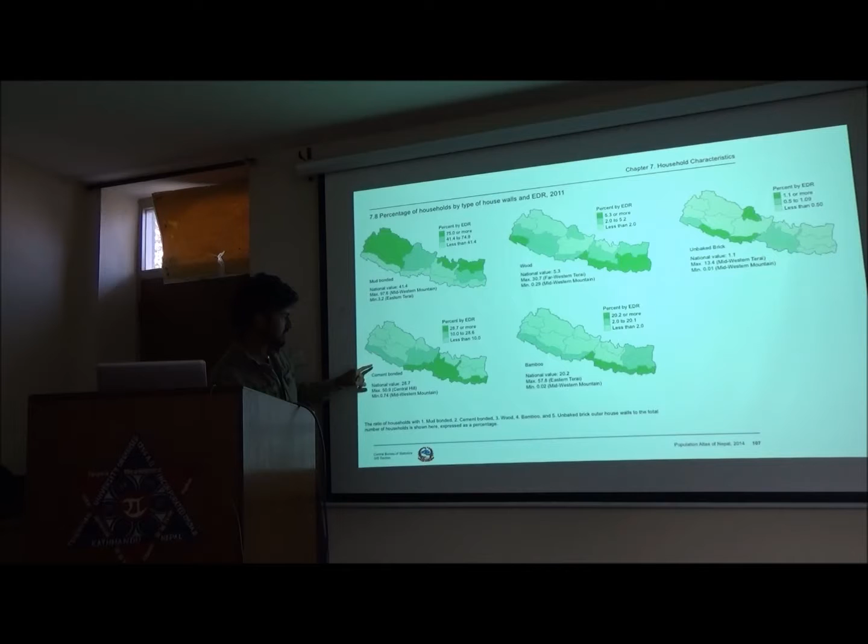The cement penetration in Nepal is very low. In some regions, like the eastern mountain region, it's as low as 1.15%. That's how much cement has reached. The maximum is 23%, which is in the plains where there is highway.

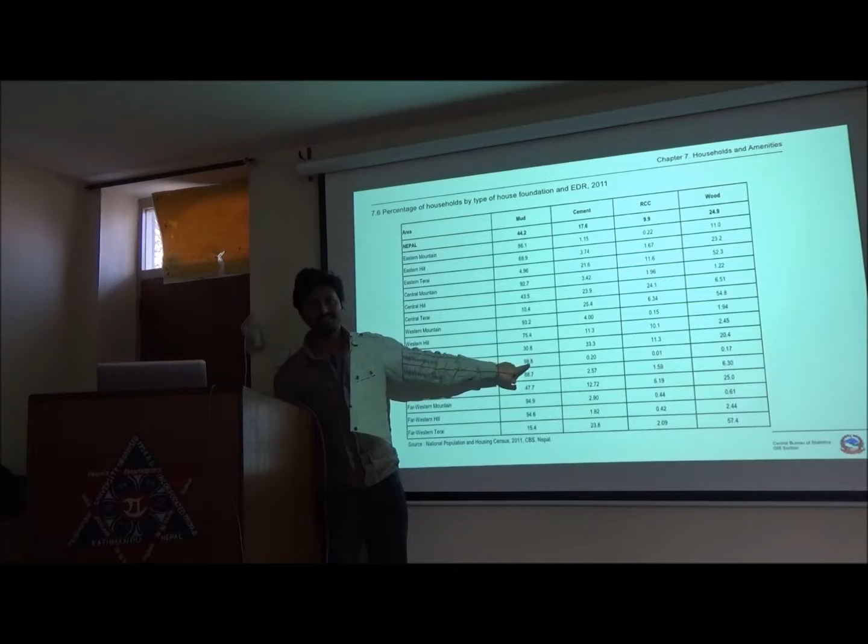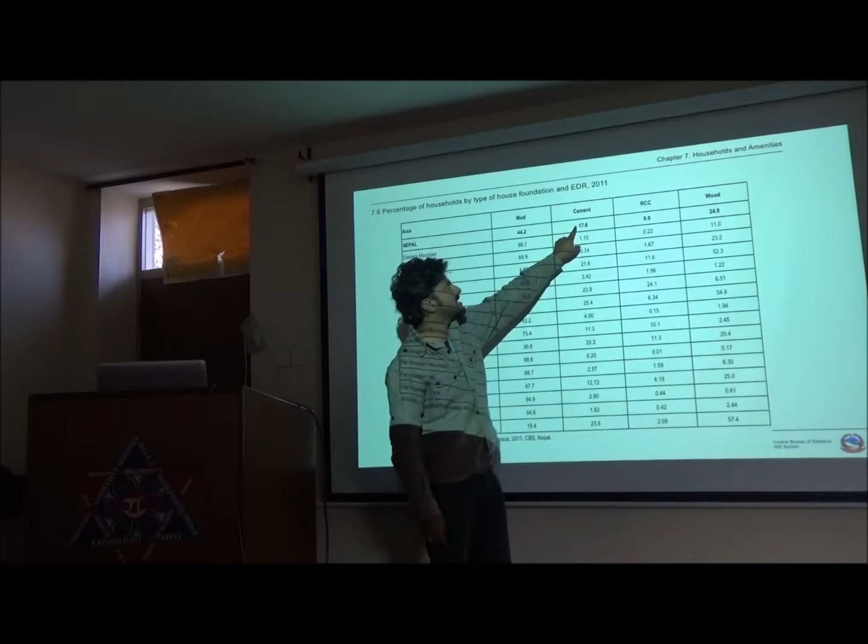But for example, in the mid-western mountain region, mud houses are 98.8%. And our government thinks mud is not the right way to build. So they are denying access, they're saying whatever you've done is illegal or wrong. 98.8%. And overall, in Nepal, there's only 17% cement penetration, and most of it is concentrated in the Kathmandu region.

So, there was a big earthquake, and a lot of people think it was only earthen houses that collapsed, and they did collapse. But for example, in this region of Chautara in Sindhupalchok, where cement penetration is only 1.1%, many cement houses collapsed. There were fewer cement house casualties because there were actually fewer in number. Of course, when you look at numbers, there were so many mud houses that collapsed, but that was because they were higher in number, in some cases 98%.

In Sindhupalchok, this whole valley, there's so many concrete houses that collapsed, they cracked. And what we're trying to say is, it's not like cement is bad or earth is bad. It's not about what you build with, it's how you build with it. That's really important. And this is what the earthquake taught us. So, this amount of cement buildings are going up every year. And the earthquake was a big setback. A lot of people lost faith in earthen buildings.

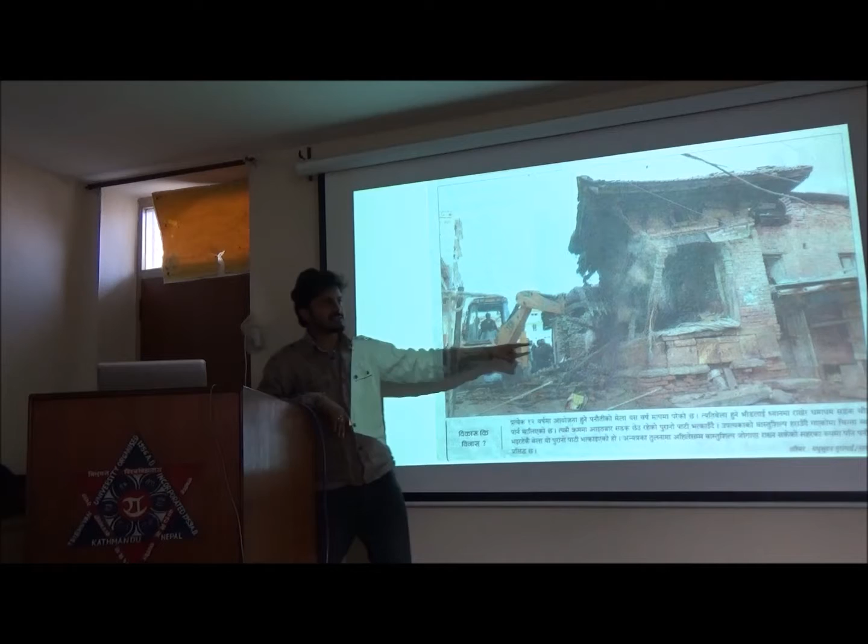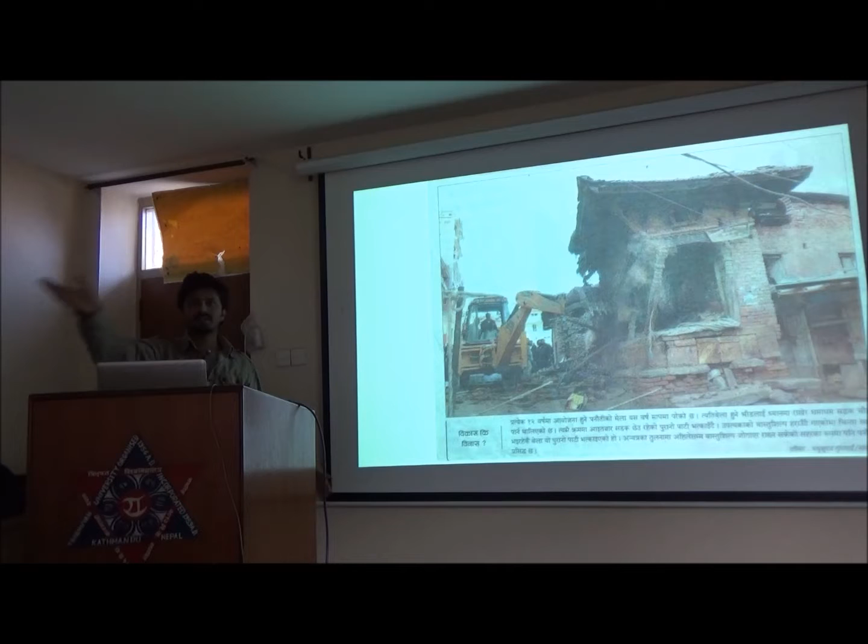But there's not only natural disaster, there's also man-made disaster. For example, this old settlement in Panauti, which is a really beautiful old Newari village. They took down all these public structures made with beautiful wood and earth so they can make bigger roads. They're knocking down beautiful temples and earthen homes so they can make 4-lane roads with concrete buildings on the side. It's really tragic. This is a picture from last week.

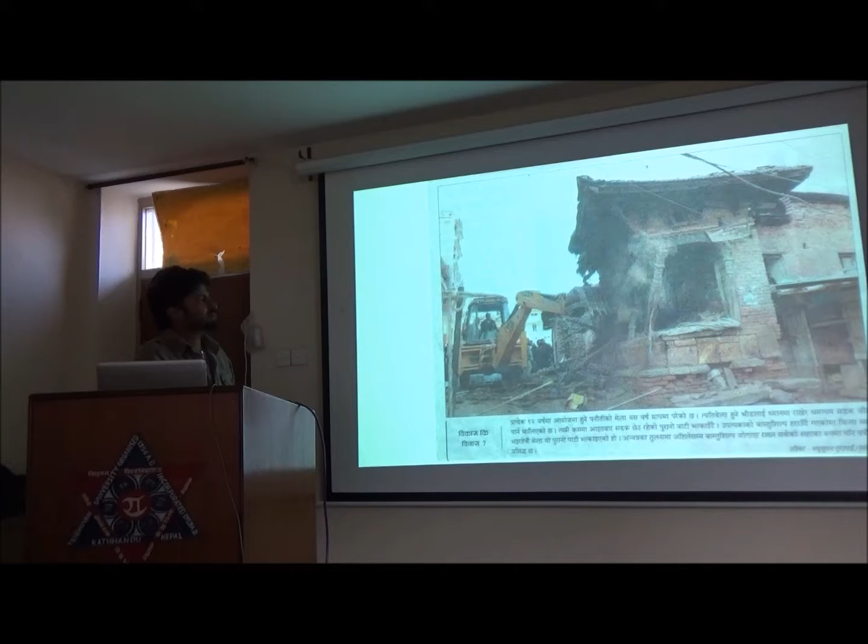And earth doesn't represent poverty. In Nepal, earth means poverty because we have not invested our human resources or our academic resources in developing it. Even in Kathmandu University, this university, the courses on earthen building are very, very low. It's almost non-existent.

But if you look at these homes in California, New Zealand, they're making really expensive homes. There are certain countries which are more progressive, like New Zealand, even though it lies in an earthquake zone, they're really promoting it. And California, also in an earthquake zone, they have a code. And actually, ASTM is coming up with a code. Actually, Nepal is not that bad. It has a code, but the energy needed to promote this material is not there, unfortunately.

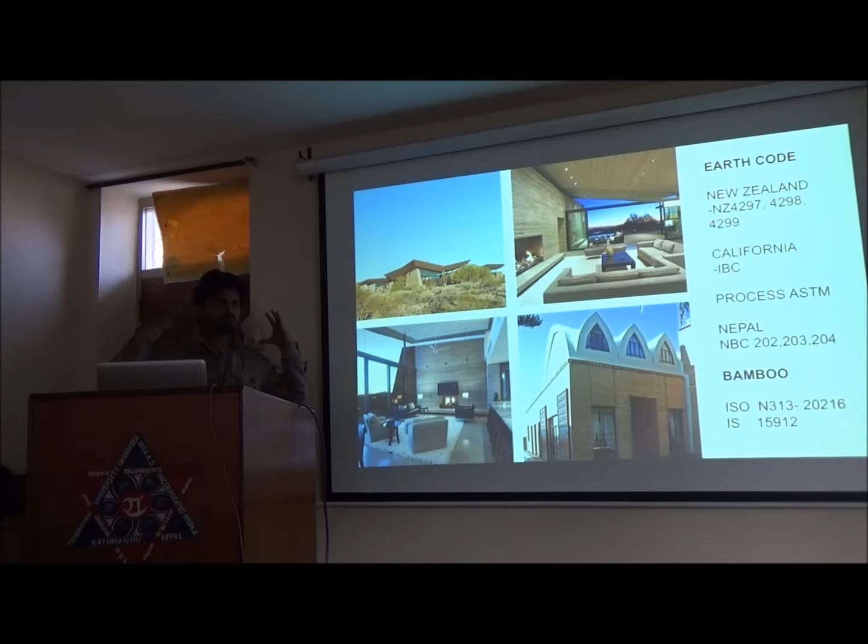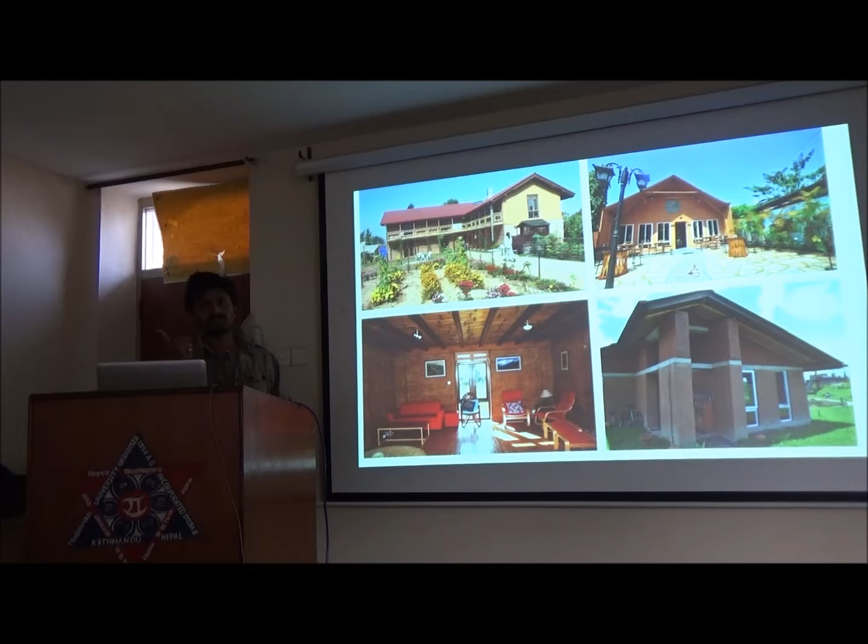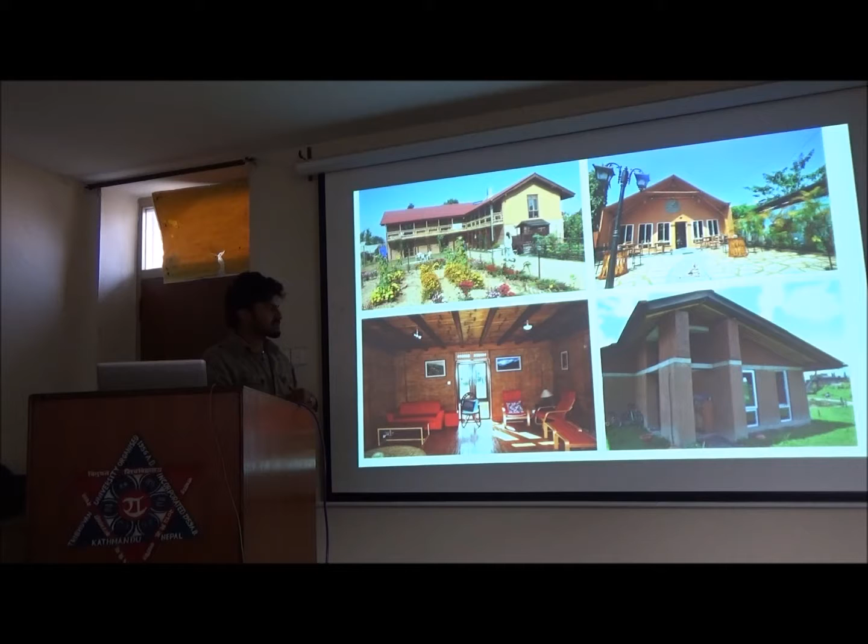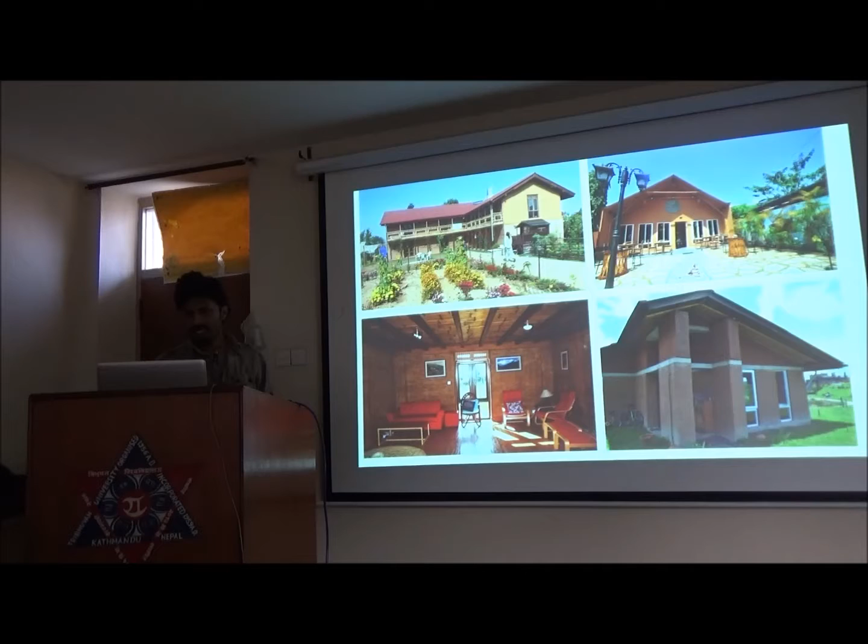So for the last few years, we've been building earthen homes in Nepal. We're trying to change the perception because we think it's not the material; we're facing two challenges. One is the perception that we have to change. The material is great, as you saw in the last slide. It's the same material, they're making beautiful homes, but the resistance to change is what's stopping us. So we are creating these modern homes with earthen materials to really fight this taboo.

In earth, we use two different materials. One is called rammed earth. It's a tradition which dates back hundreds of years, which is very common in Nepal, mostly in the northwest area. In Manang, Mustang, it was brought in by Tibetan culture. So basically you have a formwork as big as the size of your wall, and then you put clay, and then you tamp it till you get 50% compaction. It's a really great technique because it's monolithic. It makes the whole building work as a shear wall, like in concrete.

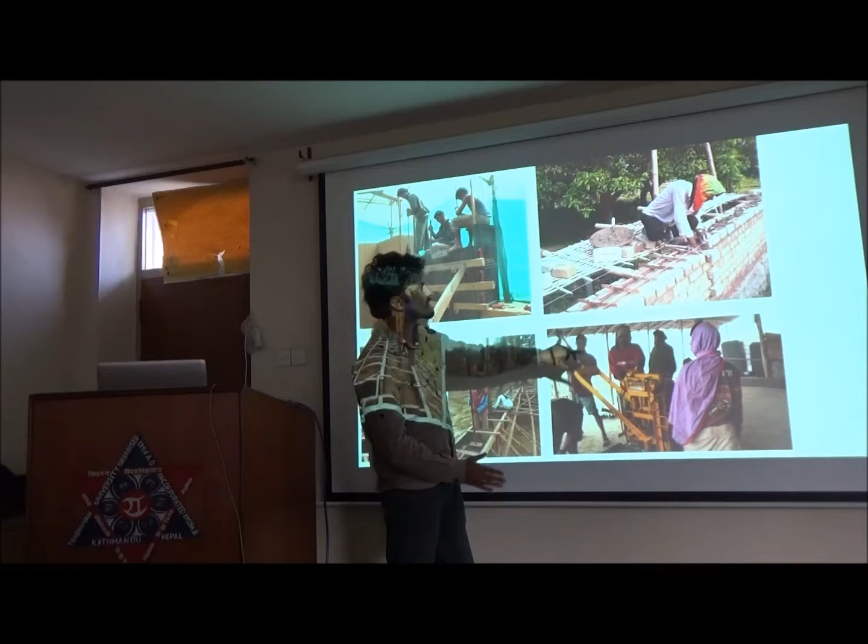It has one element, and then we do reinforcement in this, which I'll show in the next slide. And then the other material is a compressed earth block. These are basically the same material, but the application is different. Here, you make the blocks in a machine, and then you get your bricks and lay them. Here, you make them in situ, on site.

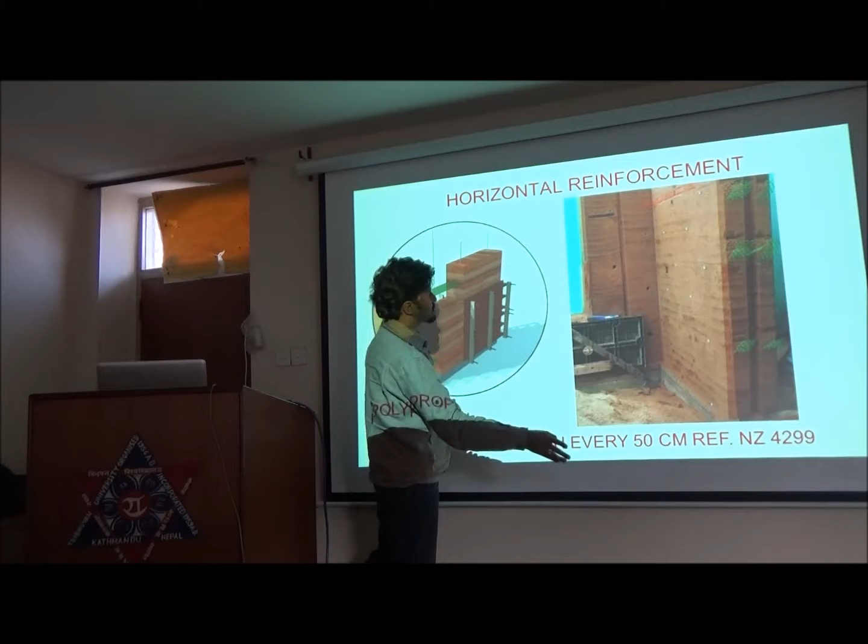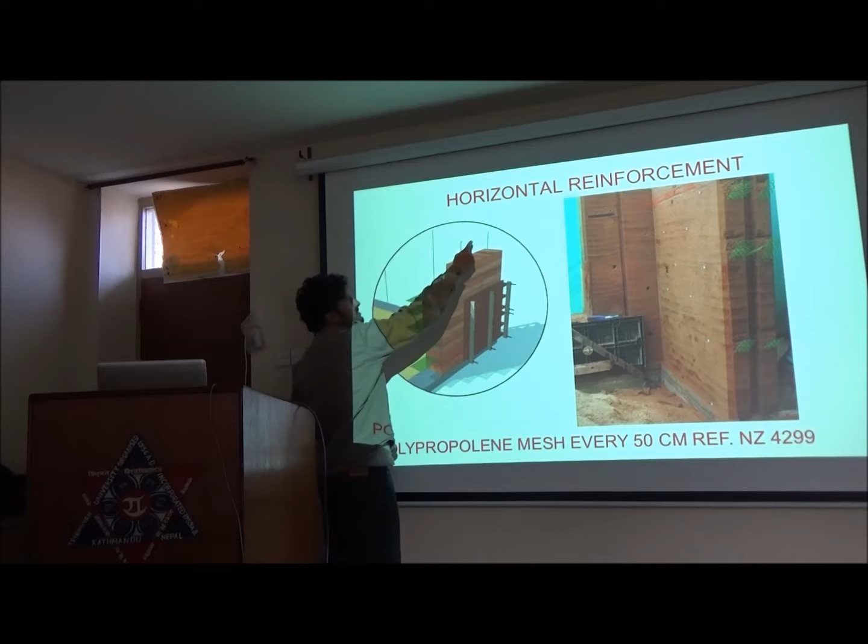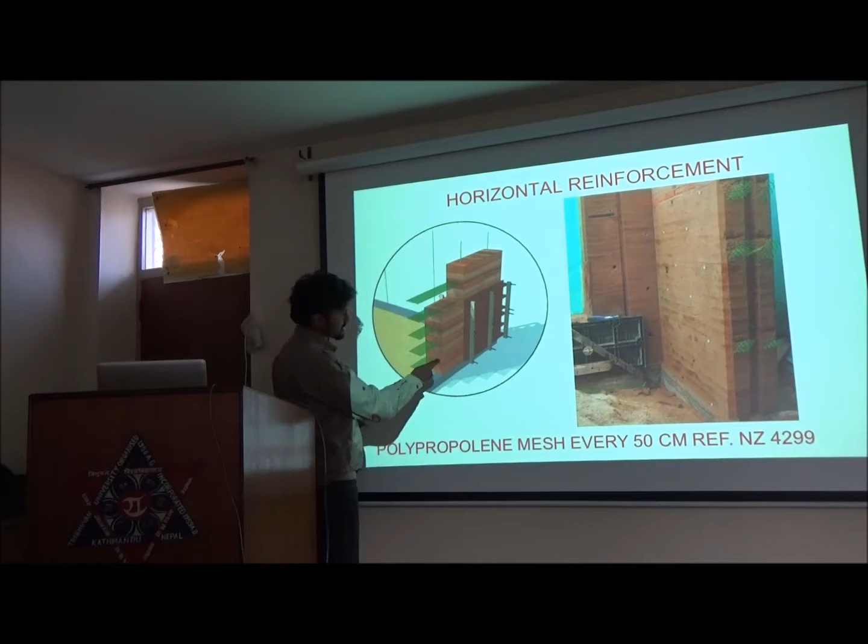Here's an example of the walls. We are very aware that it's an earthquake-prone area, so we reinforce it. We put vertical rods at the corners and near the openings, because that's the weakest point. And then we put this mesh, this polypropylene mesh, every 50 centimeters, or every 2 feet.

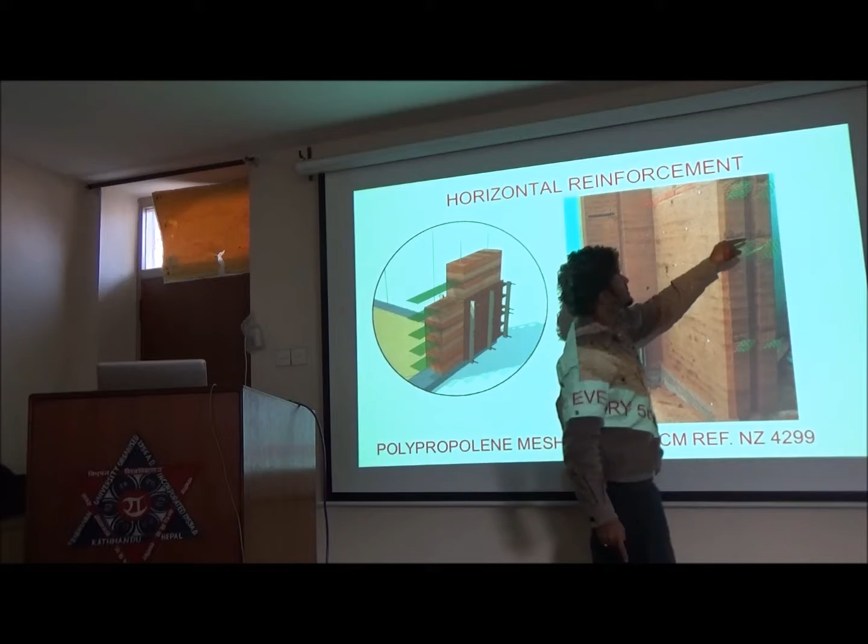Here's how you see it. So this works as stops for any lateral movement.

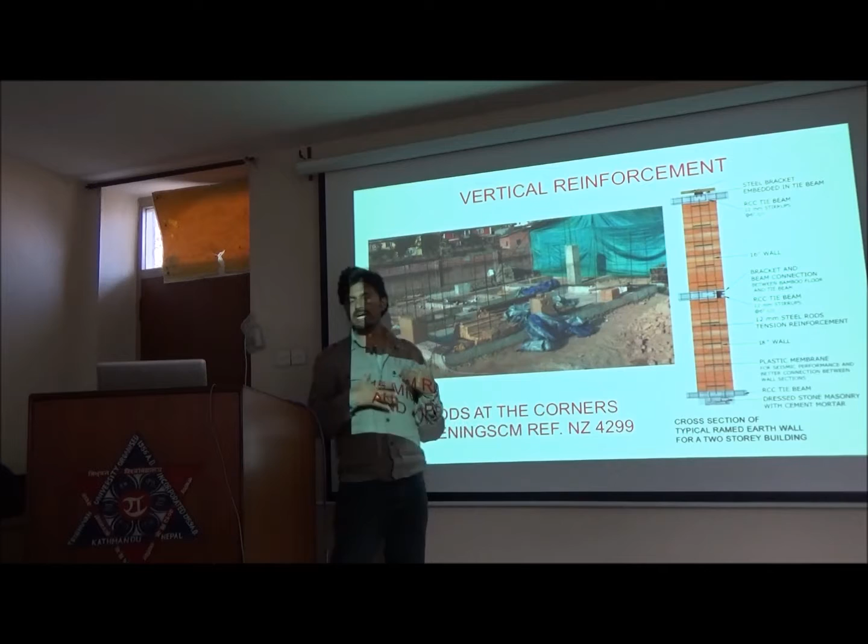So we do regular concrete foundation, you know, and every material has its own strength. We're not like bamboo or wood or earth fanatics. We want to use it judiciously wherever it is needed.

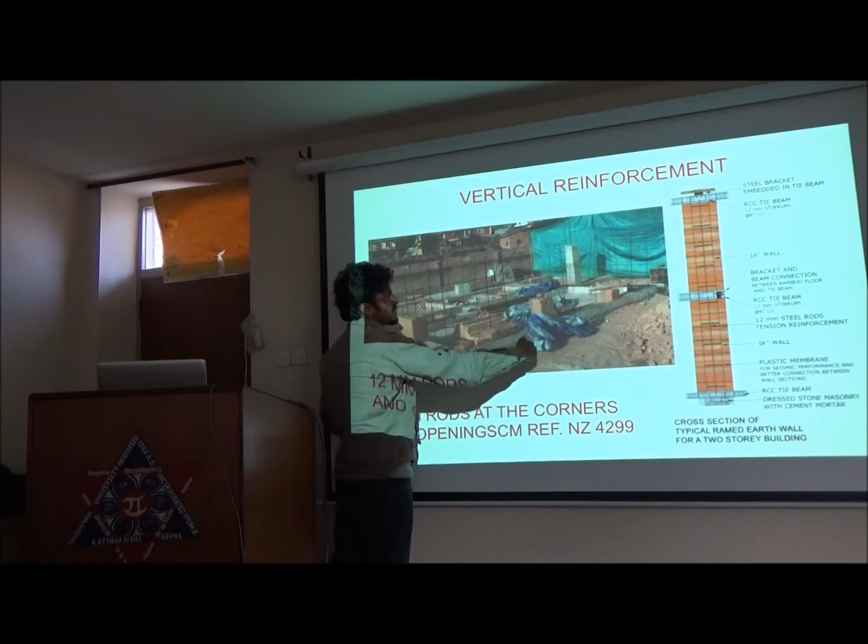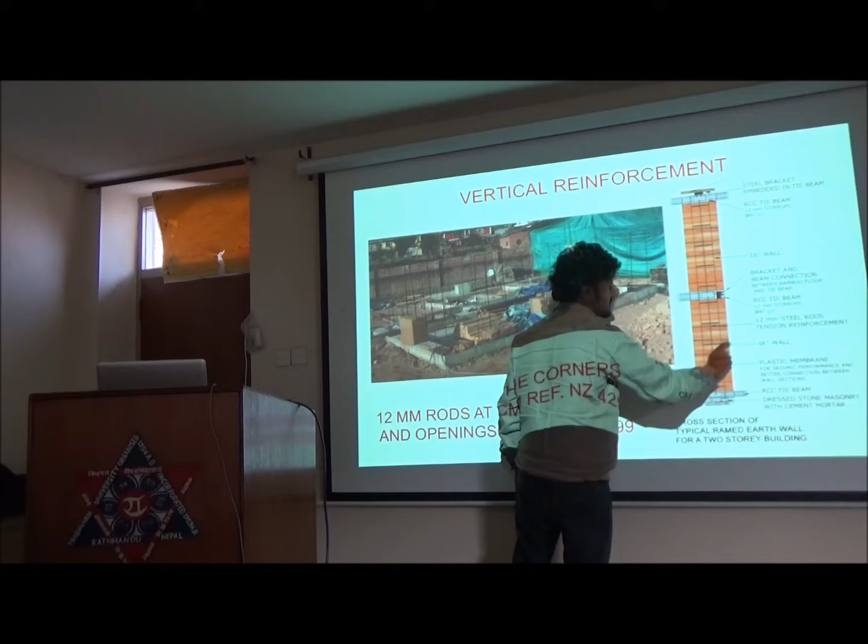So yeah, we have concrete bands and rebars at the openings. Here's a section: a concrete band, a rebar, concrete band, and another concrete band on top. The rest we just use mesh for tension reinforcement.

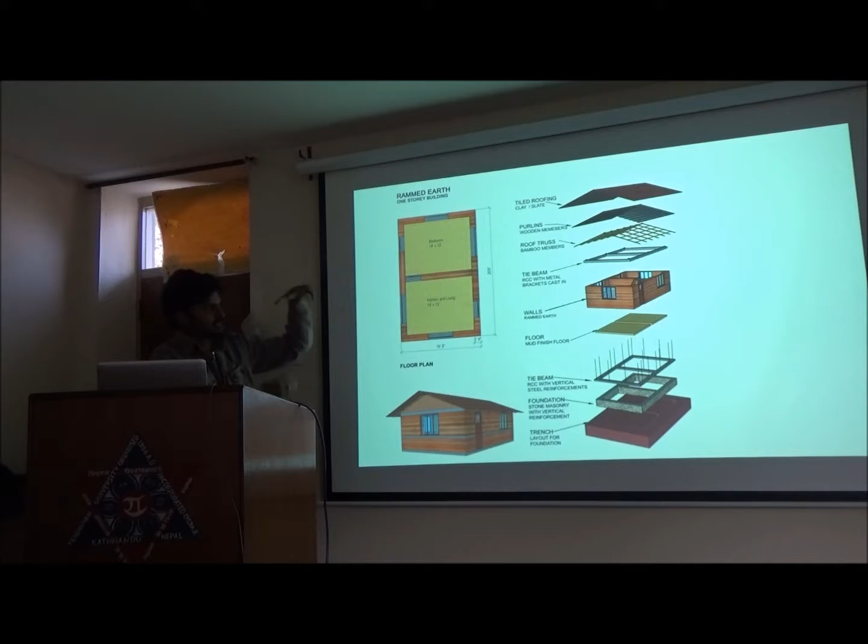And we are doing this for post-earthquake reconstruction, did some drawings using the same technique but on a lower, smaller scale.

These are tested - I mean not the same one, but in Chile, reinforced rammed earth walls really behave well in seismic tests. This is testing adobe without any reinforcement, and this is improved rammed earth with reinforcement, and they show really good results.

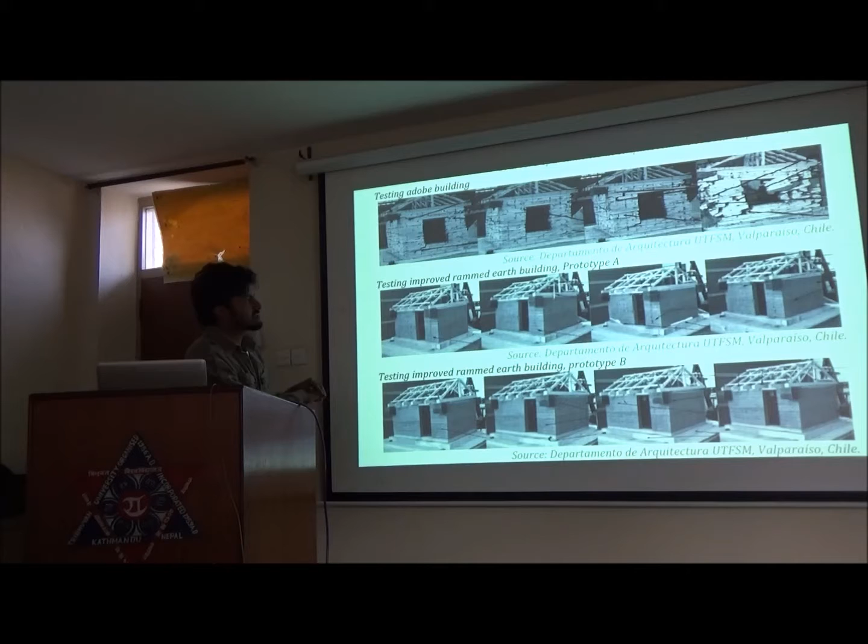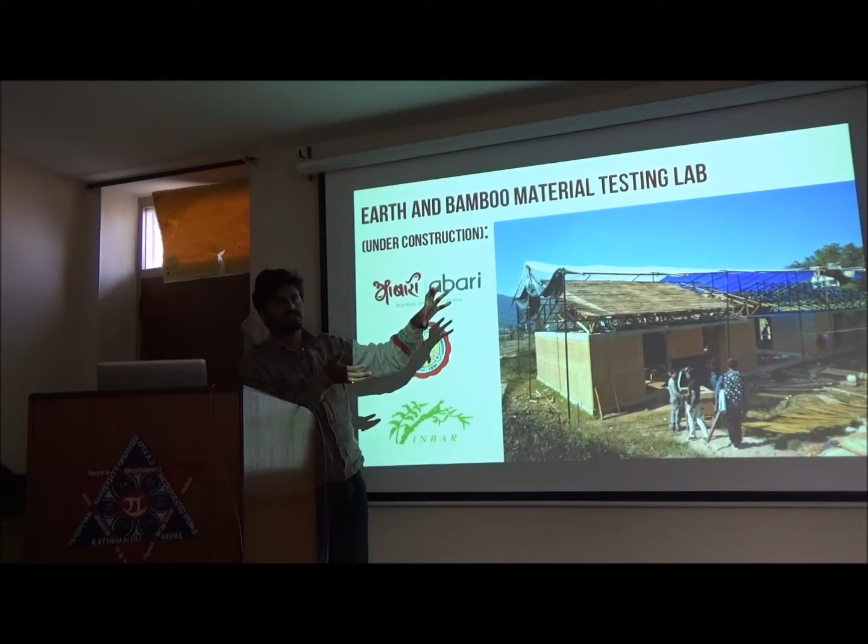So we are fighting a big battle because, like the steel and concrete industry, there is a lot of data. If an engineer wants to design something, you can always look up on the internet and find all the data, which unfortunately we do not have.

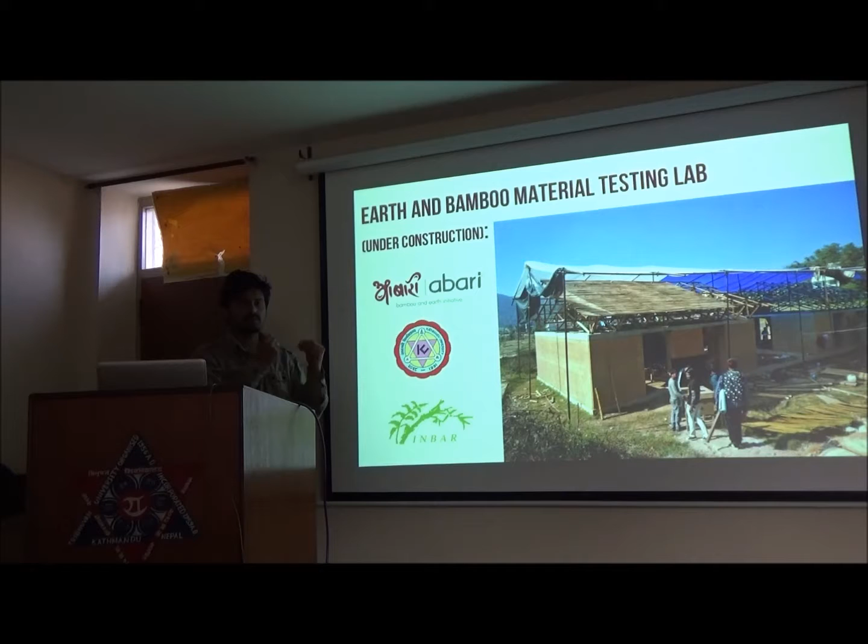We have, like especially Kathmandu Valley, it's a museum of clay, I would say, because of all the erosion, all the good clay sitting on the bottom of the hill. So it has really good quality clay, really beautiful colors like red, yellow clay, black clay.

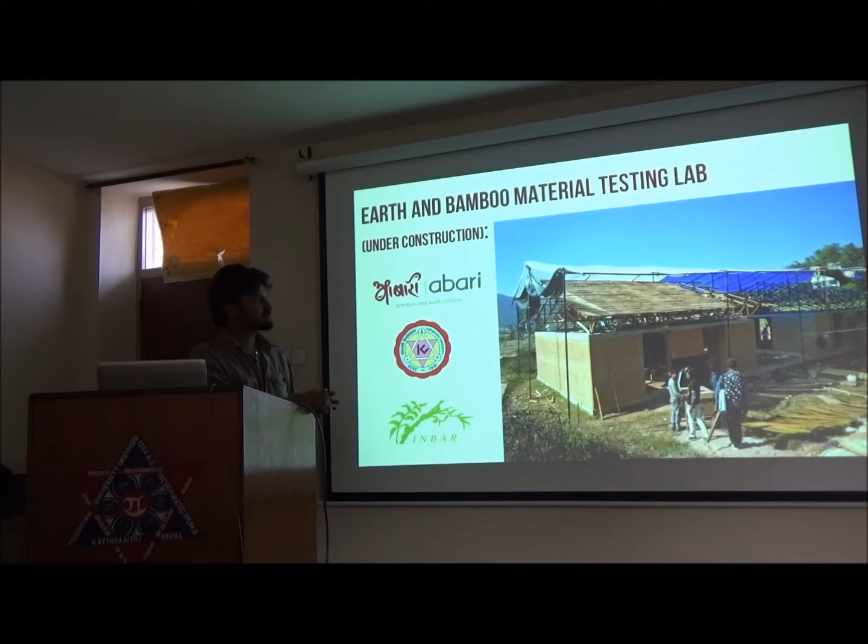But these are not tested. So we built this material testing lab for Kathmandu University, where engineering students can test it.

Because earth is such a heterogeneous material, it always changes from different locations. So we put this small machine where guys can make a block and then test it, see the strength. If it's not so good, they can change the composition and then test it again.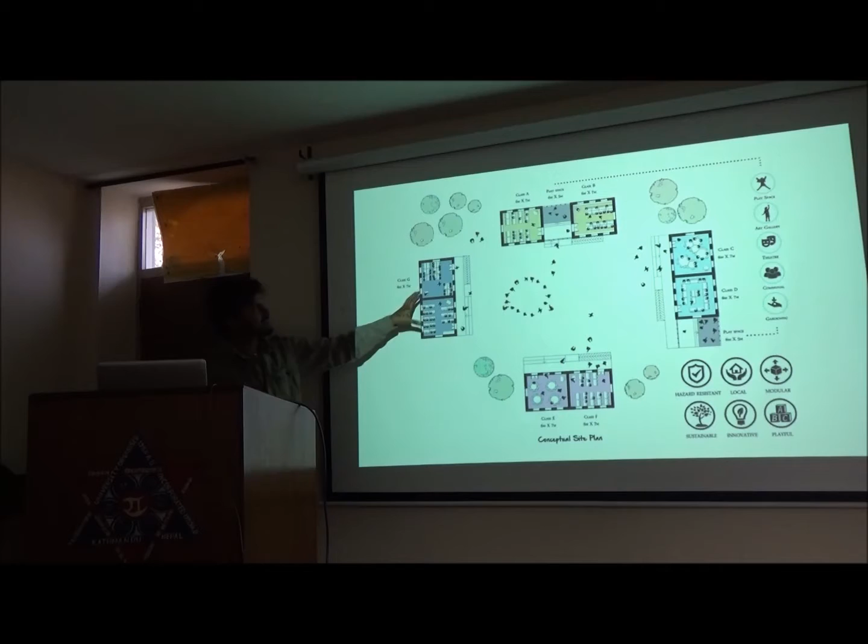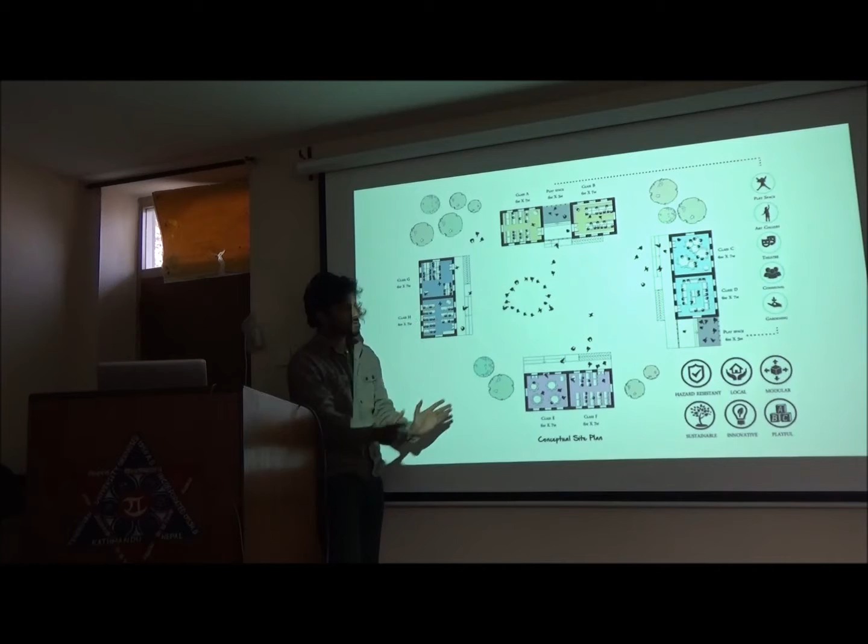We used the government prototype of a 2-classroom building with a roof. We just made some changes, added some play space in between, have big windows, use local material, put insulation in place so it becomes thermally comfortable - warm in winter and cool in summer.

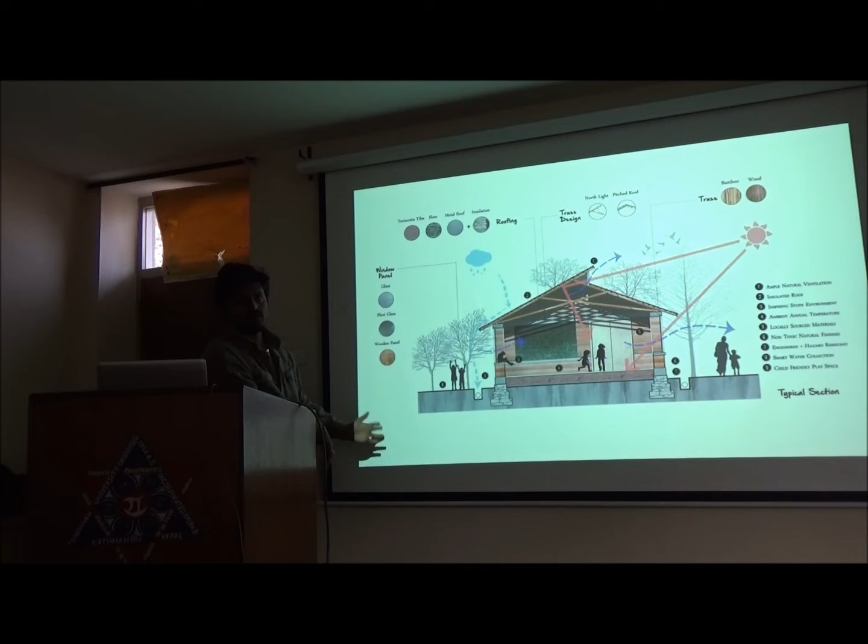All the designs use passive solar technique for heating, so it has natural ventilation. It's good in terms of acoustics. It's a very inspiring place for study, and it doesn't use any toxic paint. In a lot of schools, they want to make it colorful, and they paint it with really toxic paint. Also in some areas we're doing rainwater harvesting where it's needed, and it's very child friendly.

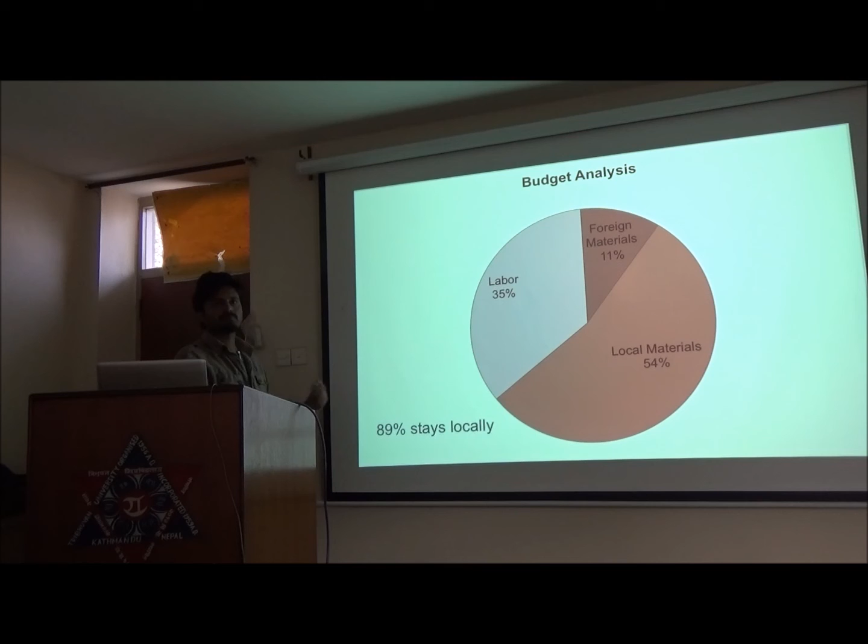And the best part of this is the local material and labor. 89% of the money that you spend stays locally. Whatever the cost is, this is about 30% cheaper than concrete building. For example, if you want to use concrete design to build a 2-classroom structure, it costs around $40,000 US, but this costs around $26,000-$27,000. So it's much cheaper, and the best part is, whatever the cost is, it stays locally.